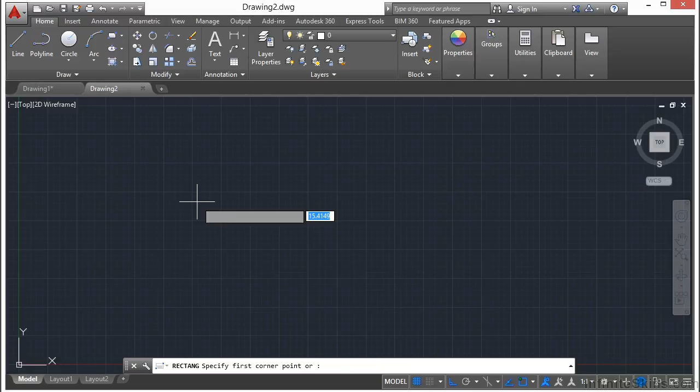Now we're going to start drawing a rectangle using the rectangle command. Just type REC for rectangle on your keyboard - that's a keyboard shortcut, which we'll talk about again later. It lets you use commands much quicker. Press the Enter key, then pick any point on your screen - it doesn't matter where. That'll be the first corner of our rectangle.

Now we want to make this rectangle 50 units wide by 30 units tall. So move to the right and up from where you first pointed. Type in the number 50, press the Tab key - that'll make it 50 units wide. Type in 30, and that'll make it 30 units tall, then press Enter.

Now take your mouse with the scroll wheel and double click it. This does what's called a zoom extents - it zooms all the way out so you can see all the line work in your file. If you scroll the wheel, that zooms in and out. You can also pan around by clicking and holding the scroll wheel. You'll use that a lot: zooming in and out, panning, and double-clicking to zoom extents.

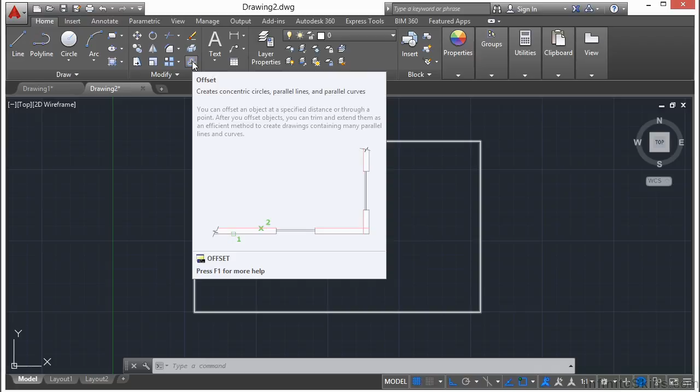Now we're going to offset this rectangle, building a wall for a structure. We'll offset it 0.5 units to the inside. Come up to the ribbon, go to the Modify tab, and find this button called Offset. You may notice that hovering your mouse over any command gives a tool tip with the command's name, and after a few more seconds, a tooltip explaining how to use it.

So if you don't know what any of these buttons mean, you can learn them by slowly moving your mouse over them and they'll show you the command. We want to use the offset command, so click it. Now we have to tell it the distance - type in 0.5 for half a unit and press Enter. When you hover over the line, it will highlight. We're going to select it - the highlight lets you know which line you've selected.

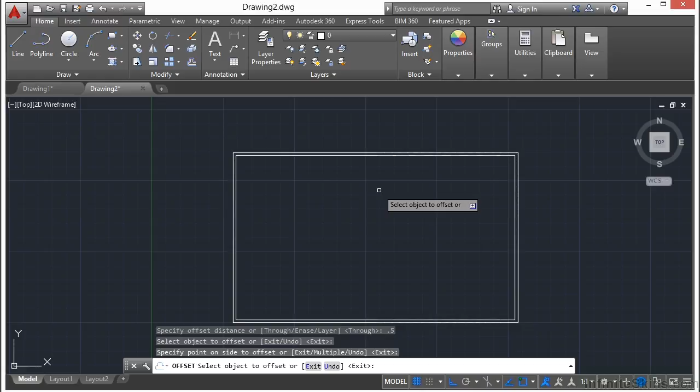I'm going to zoom in a little bit to show you what's going on here. You get a preview of what's going to happen when you use your command. Where you put the mouse compared to the line you selected to offset, that's where it's going to offset to. I want it to go to the inside, so move your mouse down, to the inside of our rectangle, and left click. And there you go, you've just made your first wall for your drawing.

Now to get out of a command, you can just press the Escape key. So there is our rectangle command and the offset command. You're going to use the offset command quite a bit.

Now we're going to open up a tool palette. We're going to do that by pressing the Control key and the number 3 key both at the same time. So press Control and 3. This is a palette, specifically the tool palette, and it has a lot of different tabs on it, giving you access to a lot of different things.

Now what we want is to get a door, so we're going to pick Architectural, and we want this Door Imperial button right here. Click it, and then move the mouse over into your options right here. You can see this door is a little big for what we have drawn, and that's okay.

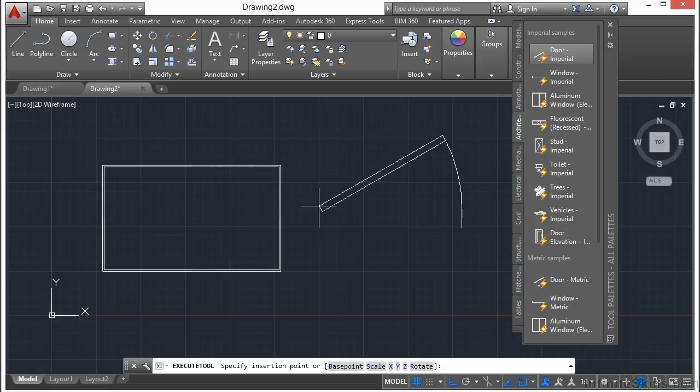Now what you're doing here is inserting a block. We'll talk about blocks later on, but a block is just a set of lines or text or anything that you can create, saved together and set up as a block. A block is made so you can easily reuse line work you've created before, for example like this door. So click somewhere on your screen, and that's where it's going to be inserted.

Now, this door is actually set up for architectural units, which means it's going to be working with inches for its units. We've set this up the way we're using our drawing now - we didn't set up units, but I'm using it in a way that it's using feet for its units. We'll talk about units and how they work in AutoCAD later on.

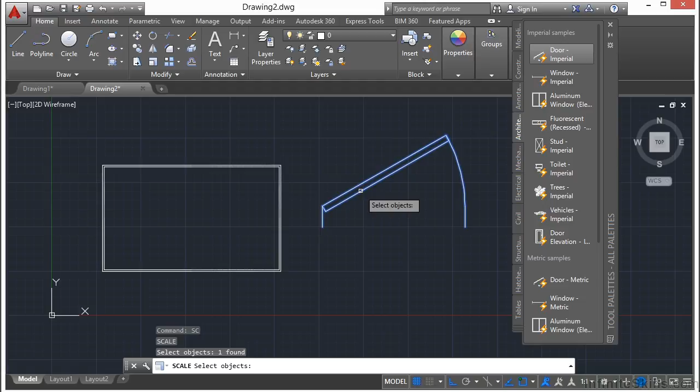Right now, we're going to scale the door. We're going to make it a little bit smaller. Type in SC for the scale command, press Enter. Select the door by moving the mouse right over the door and left clicking, and it'll turn to a highlighted blue once it's been picked. Once you've picked it, press Return, and then just pick anywhere around here inside your door. And you can see when you move your mouse, it's scaling it up, giving it a big number.

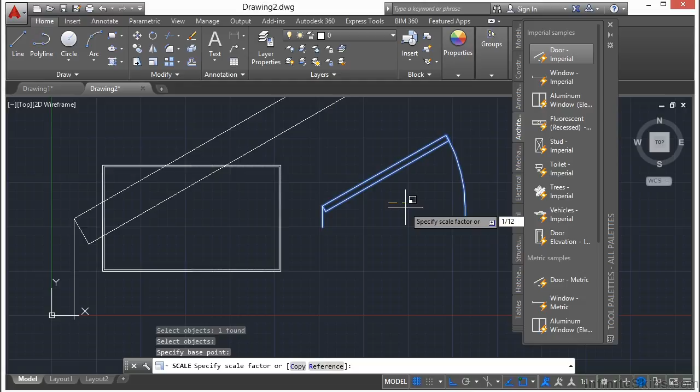Now the scale command works in a couple of different ways. If you give it a scale value greater than 1, the item is going to be bigger. If the scale value is less than 1, it's going to get smaller. And what we want to do now is type in 1/12 - we're scaling this by 1/12, going from inches to feet. Press Return. Now our door is normal size.

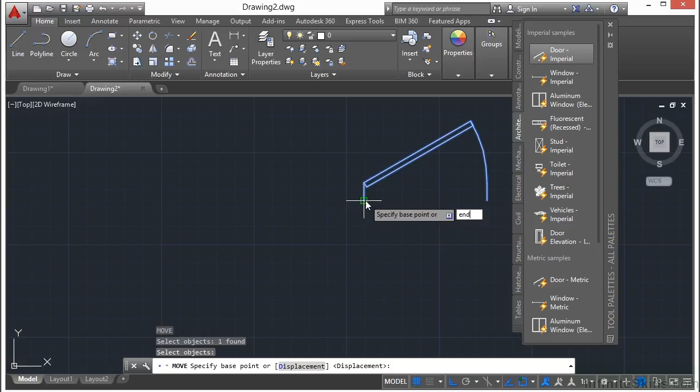Type M for move, press Enter, pick the door, press Enter again, zoom in with your scroll wheel, and we're going to snap to this endpoint. Type in E N D on the command line, press Return, left click right there in the door. Now you can see I'm going to zoom out with my scroll wheel and can move this door around wherever I want it to. I'm going to pan - you can pan and zoom with the mouse while you're inside a command.

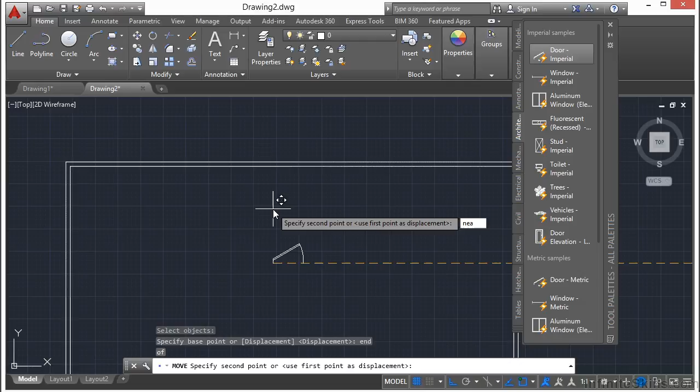Now type in NEA - this is another O snap. We're going to talk about O snaps later on in depth. Snaps or O snaps will force your line work to go into specific places on your other objects. Press Enter, and then click anywhere on the inside wall. And so there we go, we've entered in our door.

So zoom in, center this on your page, and then let's type in the word trim, T-R-I-M. Press Return, and we're going to do a crossing selection. Pick up here at the top left somewhere and drag your mouse to the right and down, and it should be a solid line with a blue area, and as you do that, it's going to pick that door.

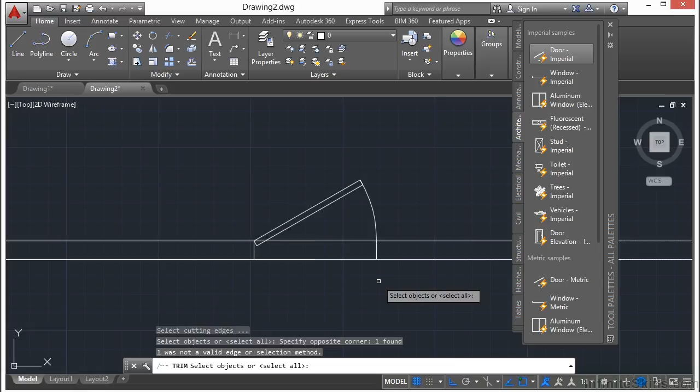Left click again, press Return, and now we're going to click on these lines. What we're doing is removing the lines from our work environment. So zoom in here and get this little line too. That was the trim command. Right click, press Enter to cancel the command, or press Escape. The trim command trims things away, it cuts things away for you.